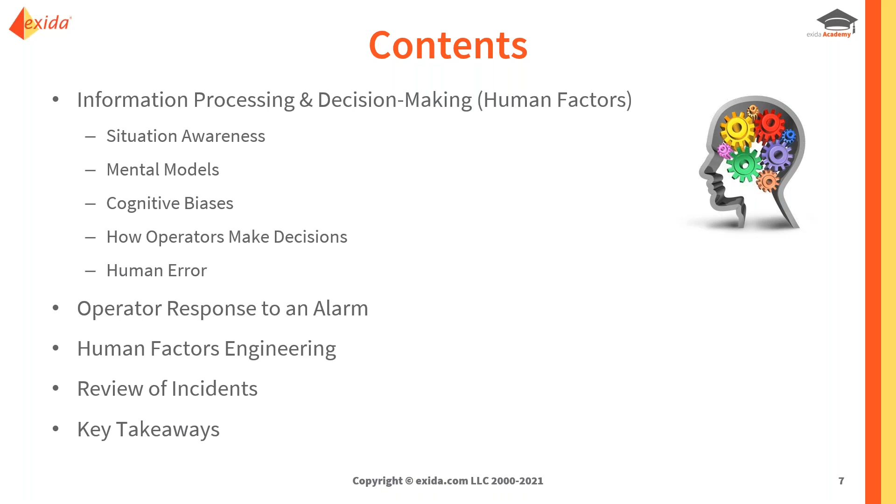So what are we going to talk about in today's webinar? We are going to focus on how humans process information and make decisions. And when I say humans, I mean in particular operators. So we are going to look at some of the key human factors elements that impact that. We're going to apply that then by looking at some incidents in the process industries and see what we can learn in terms of understanding of why those incidents occurred based on human factors, and see what we can do differently to help prevent them in the future.

So one of the motivations for this presentation is the fact that over the last 30 years or so, the number of occupational accidents, occupational safety, slips, trips, and falls has definitely decreased, but a similar reduction in incidents has not been seen in the process safety world. And actually now we're starting to definitely see repeats of incidents that have happened in the past, indicating that we're not really learning as much as we could or as much as we should from the incidents that have occurred in the past. So that is one of the goals of this presentation.

Also, from a purpose point of view, if your goal is to look for deviations from operating procedures and behaviors that operators did, or to look at assigning blame to humans and operators, then this is not the presentation for you. That's not what we're looking for. What we're trying to do is to better understand the mechanisms and factors that shape operator behavior under abnormal situations, and in particular, to better understand the context that shapes operator performance, how they make decisions and take actions.

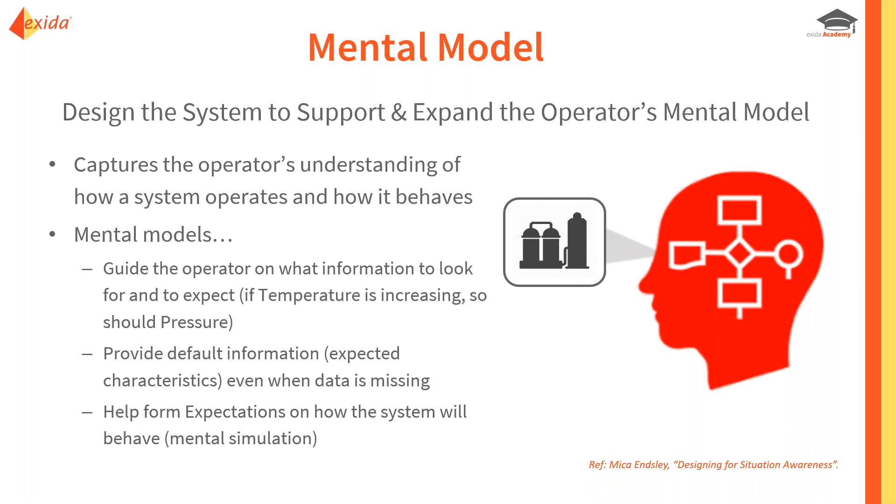And the more experienced operators have better mental models, as you would expect, of a situation than a less experienced or junior operator. So to finish up this section on human factors, the last thing to talk about is how do humans or operators make decisions in really critical situations when the crap really hits the fan.

Now, you might think that most decision making is very logical and rational. You flesh out the alternatives and rank them and score them, and you take time to pick the one with the greatest value. Well, that may be what's done sometimes, but in the heat of the moment, that's not the way people typically make decisions.

What they found by studying people that work in the ORs, nurses in particular, firefighters, they follow what's called a recognition primed decision model. So they basically look for patterns. They look at what they are seeing and reference it to past experience. And based on that, they formulate a plan on how to respond. So they are using their intuition, they're using their gut feeling, they're matching patterns based on what they've seen before.

And they don't do an extensive analysis of different options. They essentially go with the first option that looks viable. And then they refine that over time. They do mental simulations of, okay, if I do this, this is what's going to happen, or if this is now changing, this is different from what I expected. Now I make some course corrections along the way.

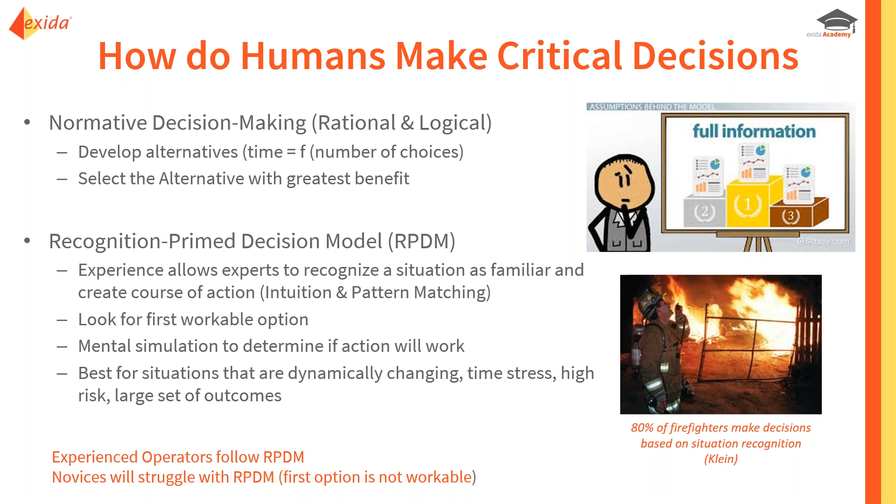So that's the way experts respond under critical situations. So an expert operator would respond that way. A junior operator or a new operator would struggle in that kind of situation because their first option that they come to might not be a very good one. So with that, we're going to transition now to Peter, who's going to talk about operator response to an alarm.

Thanks, Todd. So this section, guys, is to just capture the operator's response to an alarm, to follow on from what Todd said, and how that affects the overall safety of our process. So just to start, just a couple of case studies from the HSE website in the UK. An LPG tanker broke away from its moorings in high winds, started to drift away from the coast. Vessel wasn't damaged, no injuries, but the overall incident highlighted a problem with the alarm systems and how the operators were responding to those alarms.

In this case, it was found that the operators were routinely disabling the wind speed alarms, as any one of us would kind of appreciate that when the wind gets up and then goes back down again, the alarms are probably coming on and going off. So the justification on their end was for that reason, but they suppressed the alarm, and in this case, this was leading to potential damage and potential harm if anybody had been on board the vessel itself.

So it's a real kind of eye-opener as to, whilst it is inconvenient to have an alarm annunciating all the time from a typical operator's perspective, it is there for a reason, and in this case, they were quite lucky that it didn't develop into something more.

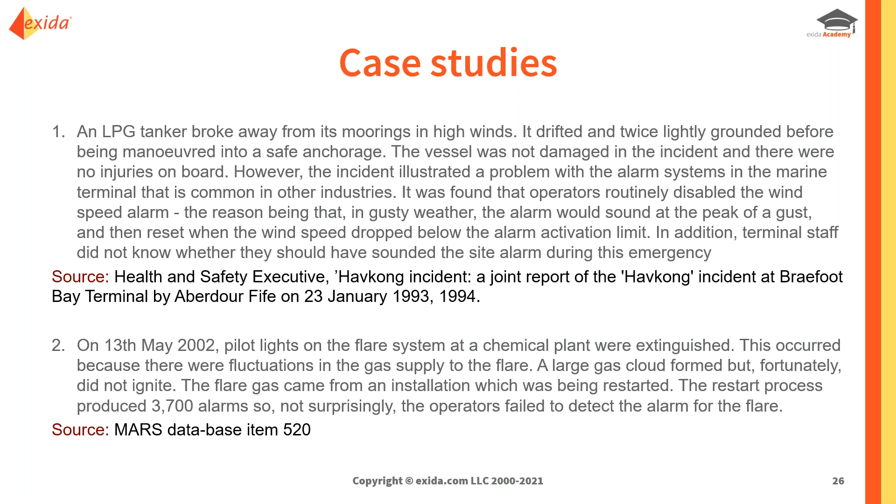So how operators respond to an alarm, and what makes for an effective response. So how, typically, we would be looking to try and model ourselves if we're in those shoes, and how would we look to try and make sure that the process goes through the right steps.

So we usually detect, and as Todd was mentioning, with our sight, with our hearing, we look to detect, like a sensor does, any kind of change in our environment or things that will alarm us and draw our attention to that. Just like a logic solver, we then would begin to diagnose. Why has this alarm gone off? What should I be looking to do? What is the process deviation? Does it require action? Is it something that has happened outside and on the field, or what is required of me at this stage?

And then typically, as we see in a final element stage as well, we need to respond. So take an action. There's a reason why the alarm went off. Follow it up. Diagnose why the alarm went off, and take an action and respond to any process deviation that may lead to an unsafe scenario.

So just to highlight the bottom, poorly performing alarm systems and HMIs impact all steps and operator situational awareness. So as we referenced in one of the case studies earlier, if the alarm or the HMI has not been set up and designed with human factors in mind and the end user operator in mind, you will not get a streamlined process of detect, diagnose, respond correctly, because the human won't be able to process all of that potentially unnecessary information to take the required action in the required time.

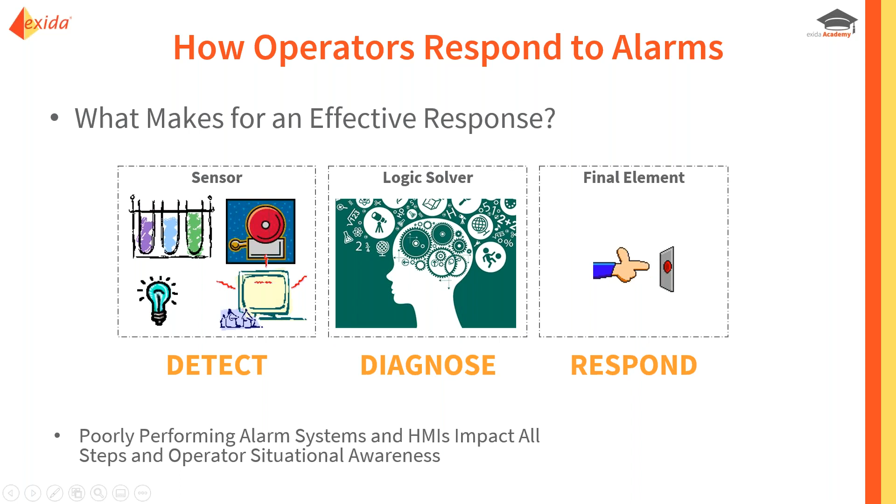And like Todd mentioned, the mental models and the patterns that start to form, especially with experienced guys, once they can process all of this stuff quicker, I've seen it in the past, they can tend to go straight to the shortcut of how we got rid of this alarm before. And as Todd mentioned, that could lead to an error also, because it might not be, in this case, the same as it was in the last case. So that's something also to watch out for.

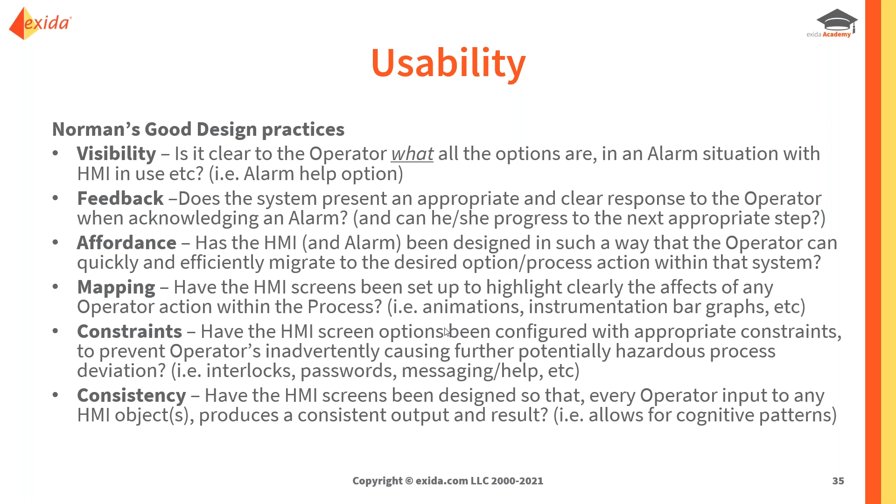And consistency: have the HMI screens been designed so that every operator input to any HMI object produces a consistent output and a result? And this allows for, as we were making the point earlier, patterns to form, so that the response time quickens, the operator gains confidence in the HMI and the process, and we effectively get a more reliable situation. So, performance shaping factors.

So the equipment design can sometimes be cumbersome, not very easy to use, and can affect the performance of the operator in an emergency situation. Working environment conditions can have an effect on how the operator performs in an emergency situation. Back to noise, psychophysics. Organizational culture and procedures can influence the decision making of an operator in an emergency situation. So that could be out-of-date procedures, organizational pressures, etc.

Personnel stresses and relationships within a team can also influence the operator's decision-making process in an emergency situation, and that could be down to supervision, personal interrelationships. And fatigue can play a major part in operator decision-making also. So, typical things like 12, 13-hour shifts, length of the hours worked, the travel, things like that.

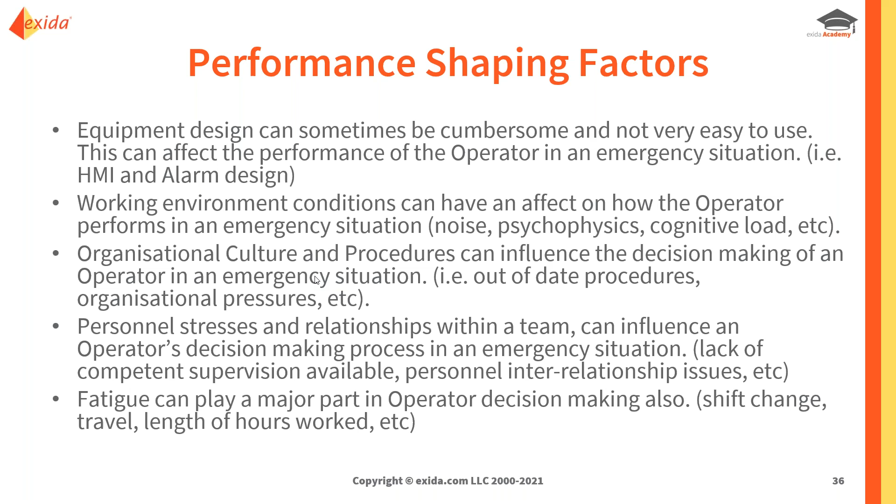Organizational culture. So are the staffing levels correct for the task responsibilities? Are there clear and definitive procedures for each task and situation? So alarm philosophy documents, alarm response. Is the culture among operators to just silence the alarms and not follow up? What is the reporting culture like? Do operators escalate certain alarms to be investigated, or do they just leave them? They should always escalate to maintenance and whoever the responsible parties are.

Is the organization adopting a dynamic competency management system to ensure the correct personnel are executing in the correct roles? So that's not just a competency effort at the start, guys. When we deliver a project, it's a dynamic, continuous life cycle effort to make sure that everybody is competent with the increased change in equipment and personnel. And are the organizations providing the latest and up-to-date training for the operators with regard to those equipment and systems and emergency response scenarios?

So human factors engineering, this would be basically at the front end, guys, incorporating human factors into the design of a product, layout, system or facility. Very important, engaging the end user of the product or the system under consideration at all stages throughout the life cycle. Consider the human factors when drafting your organizational procedures for operational tasks, and continuously assess human factor conditions throughout the life cycle of the system, product, or indeed the operator. Very important to consider these things and not have them fed back after an incident has happened on the site.

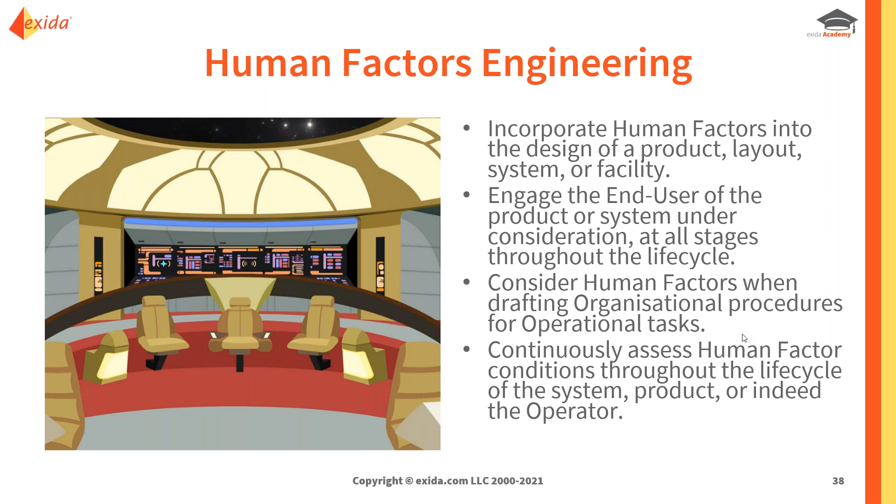So just to quickly move into the review of some incidents, and as Todd mentioned earlier, this isn't in any way a hindsight armchair exercise to point out, well, I wouldn't have done that this way, or what did they do wrong. Not at all. This is basically why it made sense for them to act the way they did. Because if we don't try and understand why the human in the situation acted that way, then it's entirely possible for that situation to happen again.

Too often in industry, there's a blame culture, and you don't ever remove the incident or the reason for that incident. So just a quick first example, an offshore facility. A drilling process was ongoing, utilizing multiple hydraulic equipment. If anybody's familiar with the typical drill floor, you'd see a lot of hydraulic equipment moving around, manipulating pipe and assisting in the process.

So the main HPU fluid registered a low-level alarm at the time for the operator. Then shortly after, a low-low level alarm due to a leak in the hydraulic system. The operator acknowledged both alarms without escalating or taking action due to the workload that was ongoing at the time and multiple tasks and responsibilities. So the alarm was acknowledged and silenced, but there wasn't a follow-up action taken.

Hydraulic oil level reached critical low level. Multiple equipment started to lose hydraulic oil and was starting to fail. And essentially the low level safety switch caused the shutdown of the main HPU pumps control system, and repairs were initiated. Now this was at a 15% set point, so you can imagine that that's an awful lot of oil to lose, and there was an urgency at that stage of the incident itself to stop the process and to try and put some hydraulic oil back into the system.

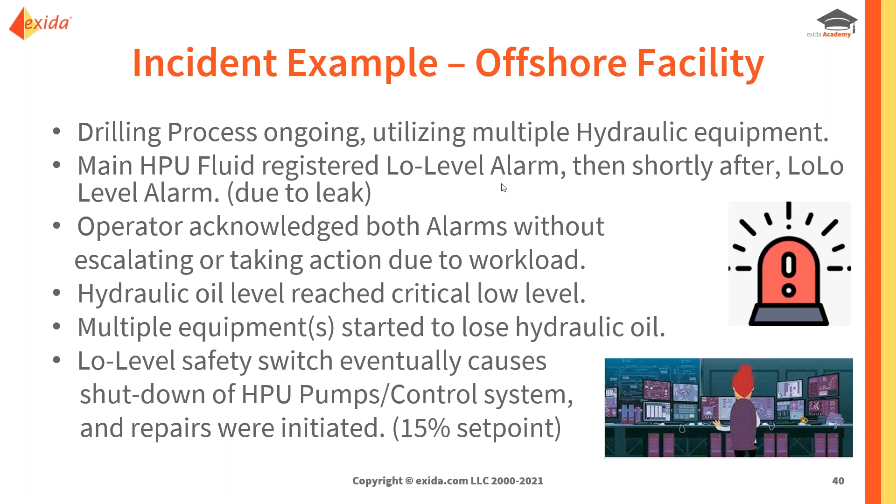So what are the lessons learned with this, guys? So why did the operator acknowledge those alarms without follow-up action? Lack of competence, knowledge and understanding. So that was what we were stressing earlier. Competence isn't just, does he know what to do in that situation? Can he functionally acknowledge the alarm? Yes, of course he can. He can click on it.

But does he understand the ramifications of the alarm, what it's about, how it's affecting his system? If he loses hydraulic oil, he might not be able to hold the drill pipe, might not be able to manipulate the drill pipe in that process that he's in. So did he understand the level of acknowledging the alarm and the repercussions for that?

His cognitive load exceeded: alarm flood, multiple tasks. In this case, the alarms were multiple. There were a lot more alarms than just this one. And there was a bit of a culture of just acknowledging in this particular case to try and see a more fluid alarm banner. And with multiple tasks and multiple responsibilities, like we mentioned earlier, humans can't process all the information at once. They can only process a certain amount. So this, unfortunately, was the one that had to fall through the net. And environmental conditions, noise, distraction, people looking for that person's attention as well.

So why was it possible for the operator to acknowledge the alarms and the system to continue operating? No follow-up action taken, and why did the system continue to operate to a 15% level? When the investigation was carried out, it was incorrect classification of alarms. These alarms particularly weren't classified as safety critical. There was incorrect prioritization of the alarms, the color code and things like that. Whilst he did detect it, it wasn't prioritized correctly.

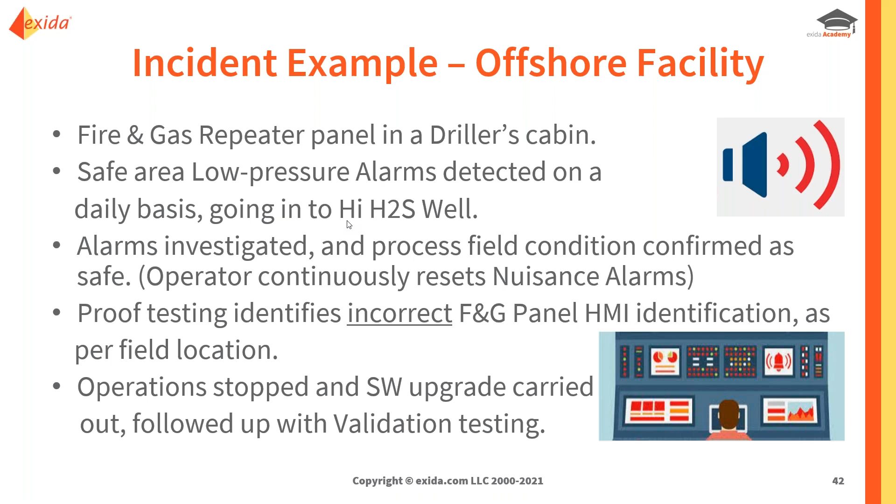So the operation was stopped. A software upgrade was carried out and followed up with validation testing and some calibration as well for field instrumentation, as that had been found also to be wanting in that scenario. So, lessons learned from this incident, guys. When an alarm becomes normalized by an operator or designated nuisance due to malfunctioning equipment, the process should always be stopped and full investigation carried out, which includes validation testing.

So in this case, the guys were normalizing the fact that these alarms were going off, assuming that because a different stakeholder was responsible for that particular piece of equipment, that would be sorted when it needed to be. So there wasn't a full understanding of the implications there. When a culture develops of just acknowledging an audible alarm because of the inconvenient noise it makes, these are usually red flags, guys. Process should be stopped and a full investigation carried out the minute that alarms are getting acknowledged, and it's been more than once that you've heard that alarm.

Lower tiered members just accepting a senior member's instruction to acknowledge safety critical alarms is potentially dangerous culture and a key performance shaping factor also. So also, if you see lower tier members within an operational team are just acknowledging alarms based on the instructions of a senior team member without question, that's also red flags, and it should be something that should be addressed immediately. Training and competency considerations are also to be looked at, and the operator does not have full understanding of the potential impact of having this malfunctioning or potentially malfunctioning equipment in the zone.

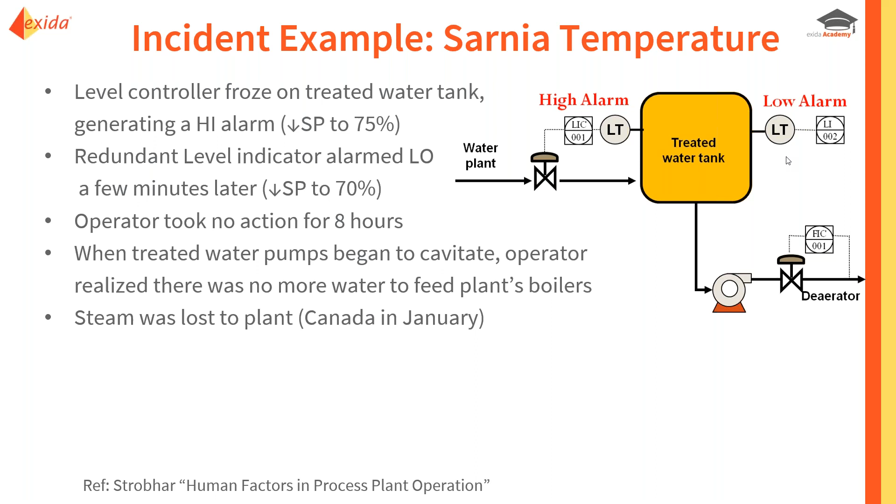So let's look at what caused that problem. So why did the operator take the wrong corrective action? Well, because they had redundant measurements on level, they actually had the benefit of easily cross-checking what was happening. So they should have been able to do that. Maybe they didn't know that that was something that they should do. So as part of training, that would be something that should be emphasized, that before you respond to something, you verify by looking at other available information that your action is needed and correct. There was also a failure of situation awareness. The way the HMI graphics were created, only the symbol for the level controller would change color to indicate the presence of an alarm.

The level transmitter, the redundant measurement, did not change color to show alarm because of some discrepancy in calibration. Looking at the alarm summary displays, there were some problems with situation awareness there as well. There were actually a whole bunch of nuisance alarms, standing or stale alarms on that summary display, about 15 of them, which made it harder for the operator to detect a new alarm come in and truly understand what was going on with all the different information, the different columns that are displayed on an alarm summary display. It was hard for them to process it.

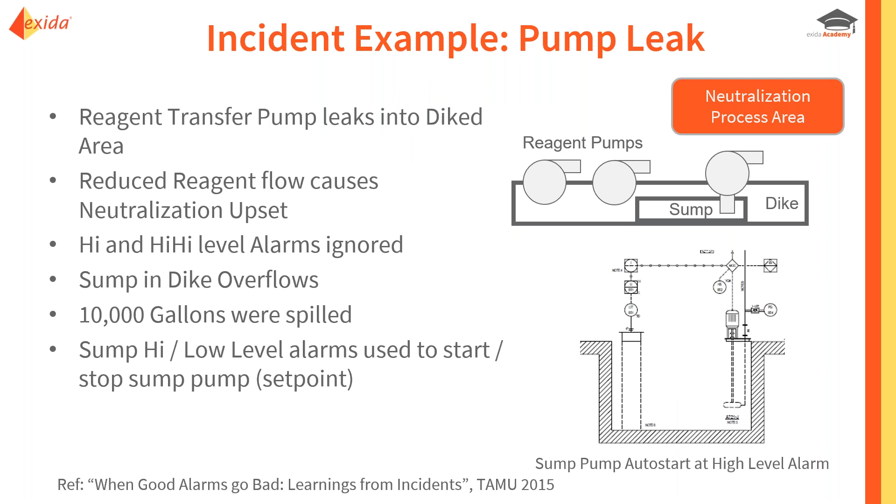So let's take a look at what happened here. Again, why did the operator not take the correct action? Well, they diagnosed the problem incorrectly. So in the detect, diagnose, respond pattern, the diagnose step was where it failed. They thought the problem was in the neutralization area, and they focused their attention solely there to try and address the problem. So they had a loss of situation awareness as well, because they focused their attention only in that process area.

Now, they probably exhibited some confirmation bias as well by taking in additional alarms and measurements from the neutralization area and not realizing that they were not successfully impacting the problem by focusing there. Now, why did they ignore the high and high-high levels in the sump? Well, because the high level alarm was a nuisance alarm. Since it was used to turn on the sump pump, every time that alarm went off, it was a nuisance.

So it actually conditioned the operator to ignore it, ignore that alarm, ignore any alarm perhaps from the sump area, and that impacted their mental model so that they didn't understand how information from what was going on in the sump could relate to what was happening in the neutralization area. So their mental model was wrong in that case.

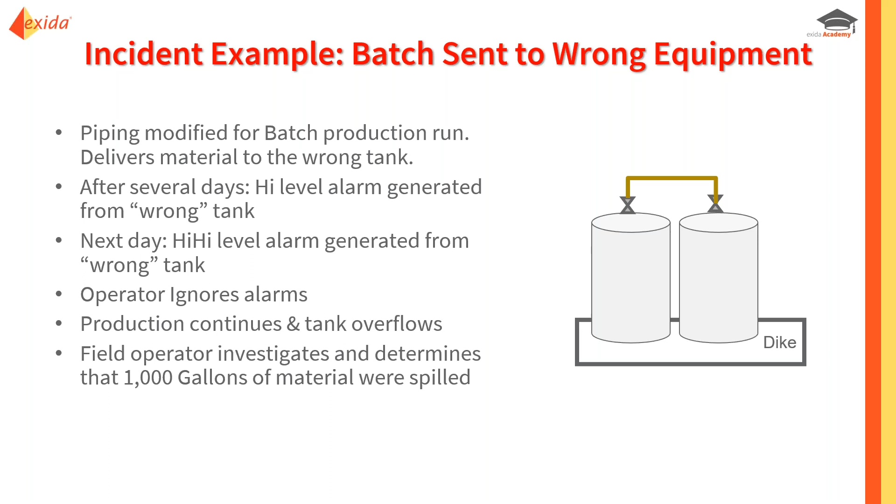Production continued, and eventually they overflowed the tank and 1,000 gallons of material was spilled. And they didn't realize that until the field operator investigated. So what happened here? Again, why did the operator not take the appropriate corrective action? They diagnosed the problem incorrectly. They felt that the second tank was out of service, was not being used. So it was not possible that there could be alarms coming from it. So they dismissed the high level alarm as well.

And again, for this particular scenario, they had the wrong mental model or had errors in their mental model that didn't take into account that a piping problem could have led to material going into this tank and high alarms. And because they didn't realize that, they did not make the correct response.

So what biases were at play here? Probably some overconfidence, because the operator didn't even seem to investigate why they were getting those alarms or false measurements to try and prove that it was an anomaly. They must have felt so strongly that it was a mess up in the instrumentation or the alarms, that there was no chance that they didn't know what was going on. So in that case, they incorrectly assumed that they knew what was going on.

This is an example of what we call incidents that occur where the wrong equipment was targeted. And it's actually very common in industry. And this is one of the areas where, for slips and lapses as well, for expert operators, you can make some changes to the design to help prevent wrong equipment errors from occurring. So now let's talk about some key takeaways, some lessons learned from this analysis. And Peter's going to start us off with some key takeaways from his section.

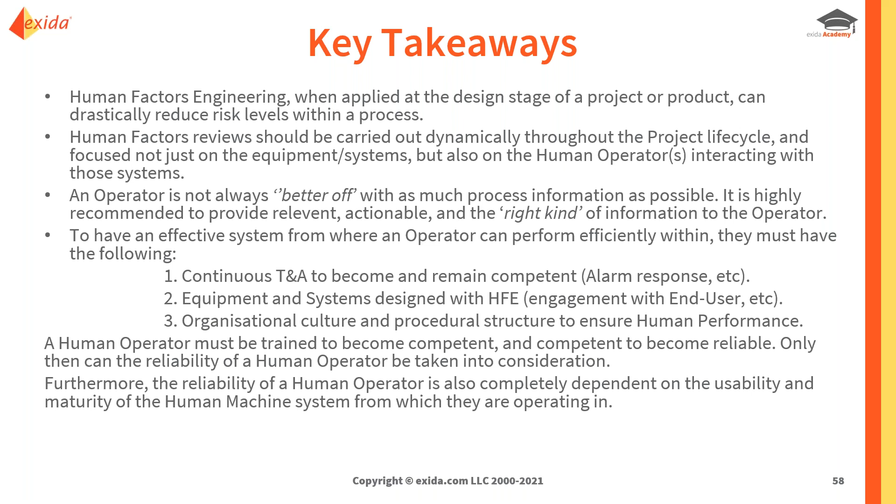So not just, have we trained the operator? Have we made sure that his competency is up to date? Yes, but we also have to look at how mature the human machine system he's working within is. Have we put him in the optimum environment to detect, diagnose, and action anything that comes in? And have we done everything we can with all of our systems, HMIs, and setup to make sure that it's as clean and crisp as possible as well?

And I'll hand you back over to Todd. Okay, and some final comments from my side.

When you're designing the system, make sure you're thinking about reinforcing the operator's mental model and situation awareness. That could include providing confirming information, like in the level issue that we talked about with the redundant transmitters, making that easy to see. We want to think about addressing differently how expert and novice operators use the system and respond and could make mistakes or make errors, and try and plan for that and plan around that or build around that as best that you can.

And then my last thought, we need a new way to think as an industry. From a management point of view, we need to focus on not blaming the operator, and when we do incident investigations, not stopping when we get to the operator action as the root cause.

From an operator point of view, in addition to understanding the individual alarms and what they mean, we also have to get operators aware of the fact that they can make mistakes or make errors based on their own cognitive biases and a loss of situation awareness. And they need to catch themselves if they are perhaps fixated on a certain solution or response which may not be true, including when an alarm doesn't make sense, rather than just disregard it, they should investigate. They should assume that the measurement is correct until proven otherwise.

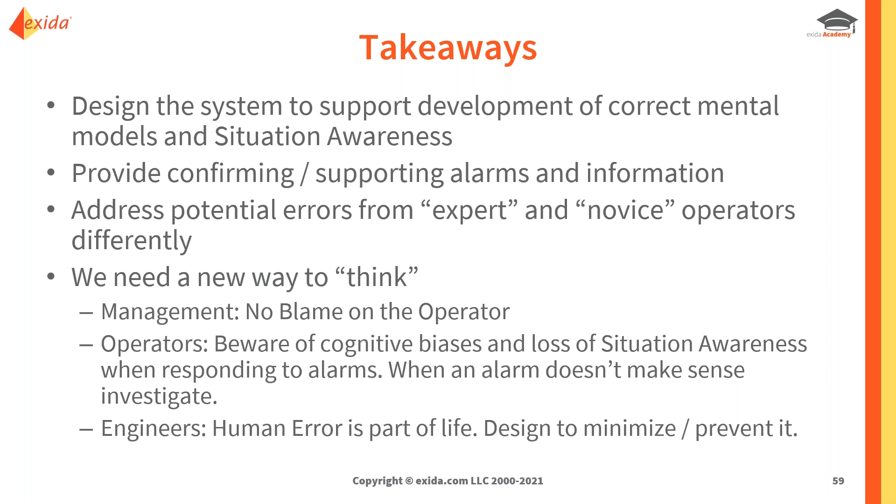And then lastly, from an engineering point of view, human error is a part of life. It can't be totally eliminated. However, effective design can minimize or prevent it.